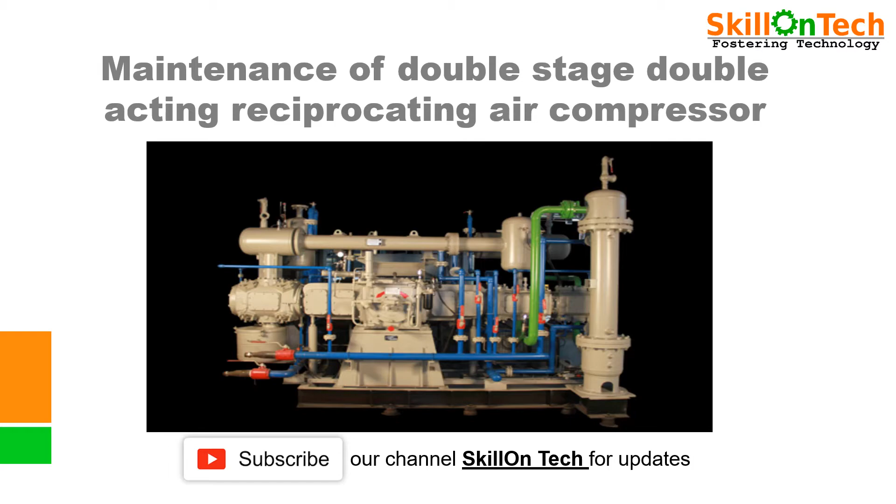Today I will explain and discuss about maintenance and overhauling of double stage double acting reciprocating air gas compressors. Why is maintenance required for compressors? A picture of a compressor is given along with important parts for your reference.

The air gas compressors used in industries provide continuous service and their operation leads to wear and tear in rotating components. After recommended hours of running as per OEM, vis-a-vis working in environmental conditions and our engineering experience, the compressor is to be taken under maintenance to ensure uninterrupted operations and avoid production losses of industries.

The discussed compressors are non-lubricated type, balanced opposed, horizontal axis, double stage, double acting reciprocating compressors. In double stage, double acting compressors there are two cylinders: one is LP cylinder and another is HP cylinder. Here you can see the difference in sizes of the cylinders. The bigger size one is the LP cylinder and the smaller size volume cylinder is the HP cylinder.

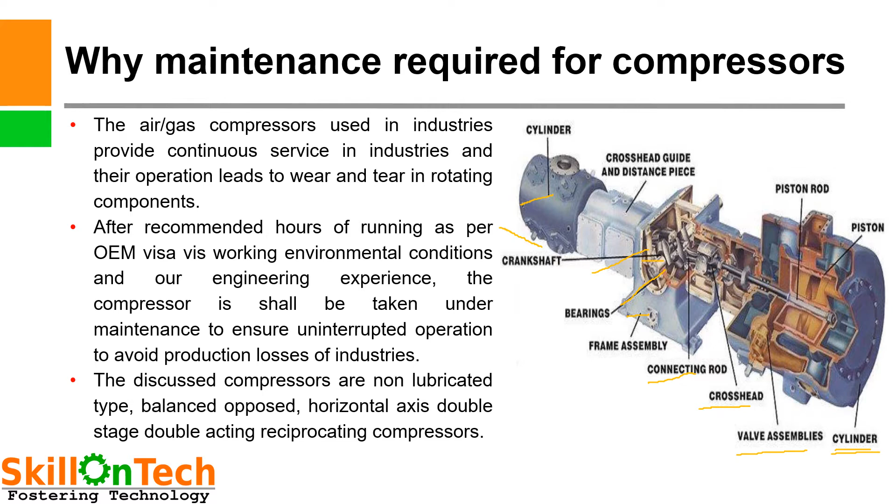When a compressor is to be taken under maintenance, there are certain criteria and decisions. The first point is operating hours of the machine. So how many operating hours have been completed by your compressor is a very important criteria.

Environmental working conditions plus our engineering experience with the machine matter too. We know in some industries there is a dusty environment and in some there is a clean environment, so this environmental working condition is a very important factor to be considered while maintaining a maintenance schedule. Besides this, we have to also include our engineering experience for preparing maintenance schedules.

Results obtained during predictive maintenance are also important. While carrying out predictive maintenance, we have to measure the temperatures, the speed of the machine, and the vibrations of the machine. All those factors are to be considered while carrying out preventive maintenance as per preventive and overhauling maintenance schedule.

In case of breakdown of the compressor, if any breakdown occurs suddenly, then we have to carry out maintenance of the compressor. If the compressor is not giving desired performance, if it is not giving flow and pressures as per design features, then we have to carry out maintenance or overhauling of the compressor.

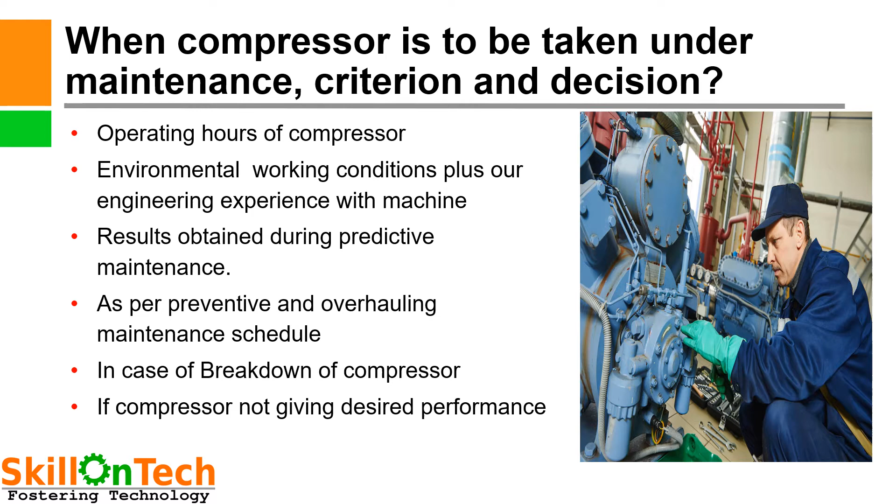What are the important checks under maintenance? Let us know. Clean or replace the air filter. Change the oil filter element, primary and secondary. Tighten or replace gland packing. Inspect oil scraper rings.

Replacement of crankcase oil as per OEM recommendation. Check the belt tensions of the compressor, or replace the belts if worn out. If one belt is worn out, we have to change the complete set of belts, otherwise tension of the belts will be different and our belts will wear out fast.

Flywheel and motor pulley grooves: due to long operation of the flywheel and motor pulleys, the grooves become deepened. This also causes worn out belts and belt slip to occur, which will reduce the flow of the machine. So that is to be checked.

Cooling water supply, inlet and outlet, is to be checked. Moisture traps working and strainer cleaning. Solenoid valve and pressure switch working or inspection. Calibration of HP and LP side SRV safety relief valve.

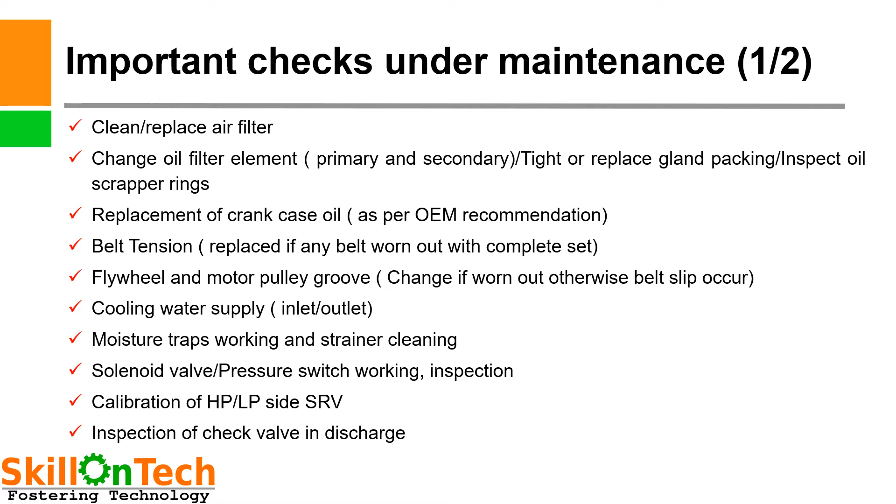Inspection of check valve in discharge, because sometimes our check valve may be faulty and backflow may occur to the discharge or suction valves. Replace worn out valve plates, spring plates, and testing of valves. Piston rings or sealing rings, if they are worn out, shall be replaced.

Piston and piston rod blocking nut shall be checked time to time for perfect tightening of the piston with the piston rod. Cylinder condition.

We have to check the LP and HP cylinder conditions, whether there is scoring or pitting marks. We have to check the dimensions of the cylinders, whether they are correct or worn out. If the cylinder is worn out, it will not give desired flow because there will not be perfect compression. Intercooler and aftercooler tube bundle cleaning.

Over a long period of working, intercooler and aftercooler bundles can be clogged. So time to time cleaning of intercooler aftercooler bundle is required.

TDC BDC clearance check. While carrying out maintenance, we have to check the TDC BDC clearances, and that should be perfectly kept to achieve desired compression.

Replace journal main bearing, big end and small end bearings as per overhauling maintenance schedules or OEM recommendation. We have to check diametrical clearances of main bearings, small end bearings, and side clearances in crank.

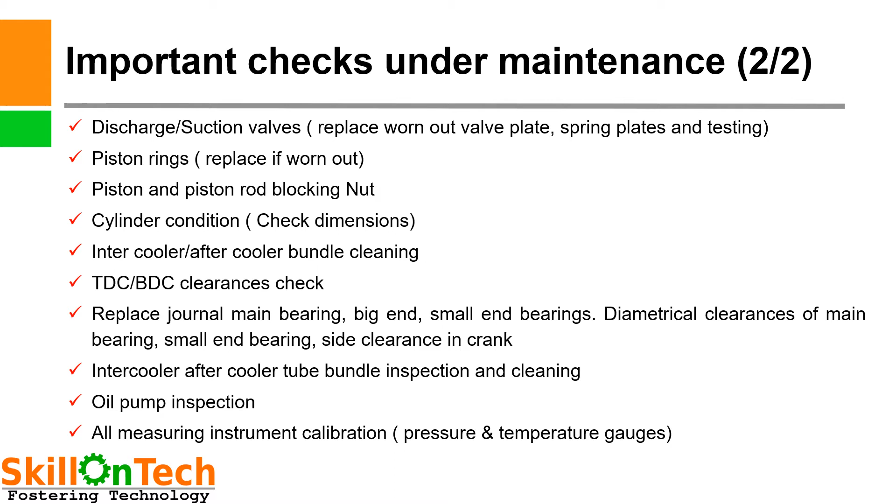All measuring instruments which are mounted on the compressors are to be calibrated, such as pressure and temperature gauges, during overhauling of the machine. Important components of air compressor.

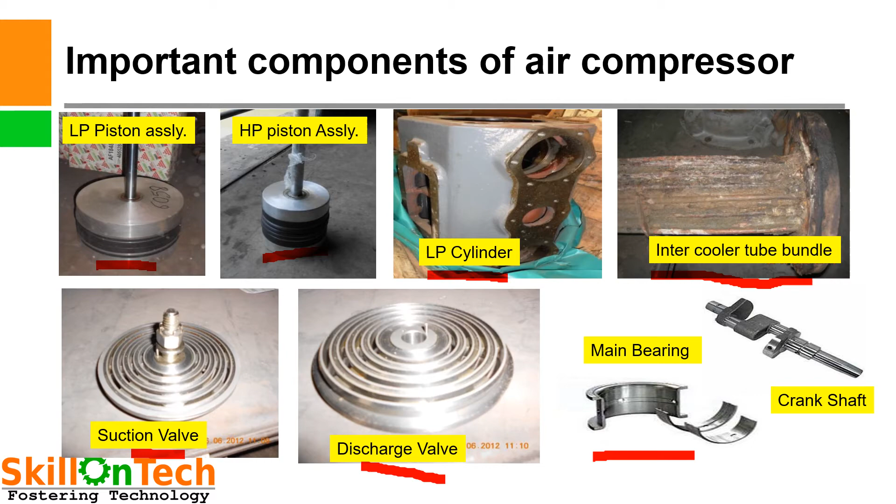Some important components are shown for your reference. Let us see. This is a LP piston cylinder assembly. This is a HP piston cylinder assembly. This is a LP cylinder. This is an intercooler tube bundle, which you can see is already under operation and in clogged condition, which requires cleaning. This is a suction valve, the discharge valve. These are the main bearings, and this is a crankshaft for reference.

Important components of air compressors. Internal components of air compressors are shown here for your reference. So let us see. This is a crankshaft which is shown. This is a connecting rod, as we already discussed, and this is a piston rod.

In the piston rod, on one side there is a stuffing box with gland packings, and on this side are oil scraper rings, which are mounted here inside for preventing oil slippage from the crankcase to this chamber and outside into the atmosphere.

This is your cylinder, and this is a compressor inlet. This is compressor discharge here. So once LP compressor discharge will go to the HP cylinder inlet.

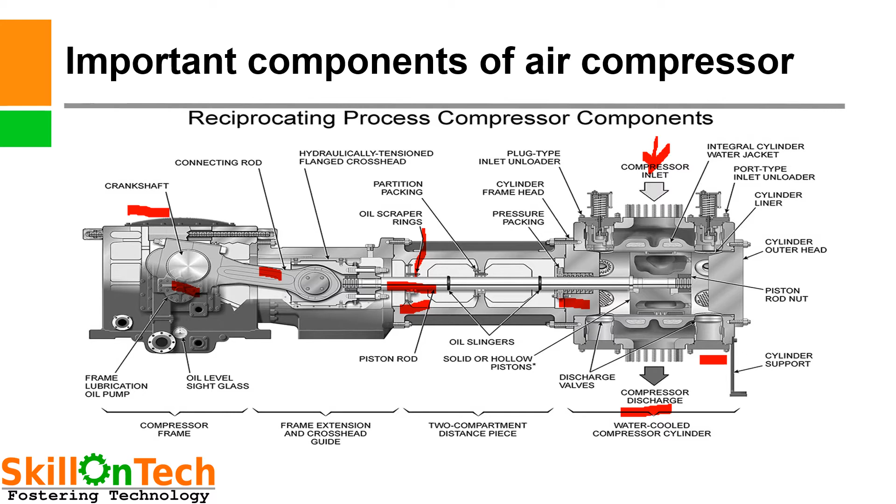Let us know the dismantling procedure of air compressor during overhauling. Dismantling of air compressor shall be done using proper tools. So technicians must have proper tools, and then only they should start dismantling of the machine.

Otherwise accident may occur. If we use non-prescribed tools, that may lead to accidents.

So first of all, what we will do is drain lube oil and collect it in another bucket. Remove belts. Remove all measuring instruments, pressure gauges, temperature gauges.

Remove LP-HP safety relief valve. Dismantle intercooler and aftercooler. Remove suction and discharge valves, and then dismantle end covers of HP-LP cylinder.

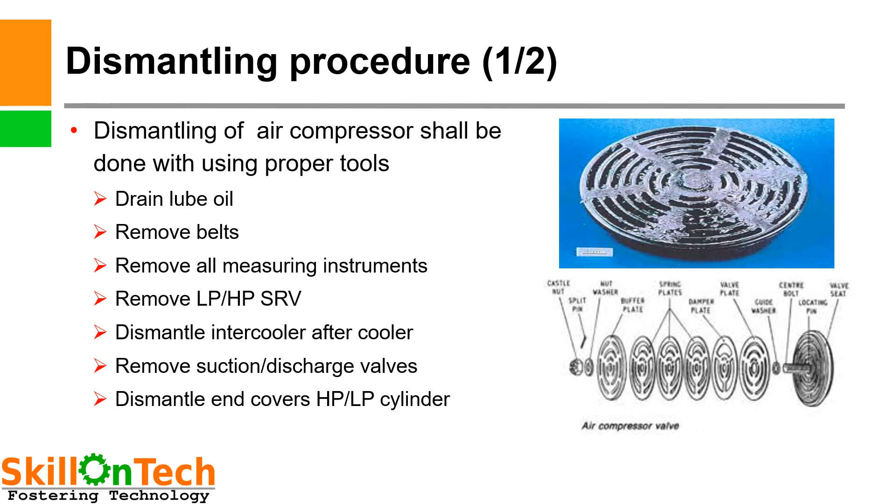Dismantle oil scraper rings and remove gland packings with suitable tools. Dismantle LP-HP piston assembly by opening the blocking nut and further opening the piston nut. Open LP-HP cylinder jacket covers.

Remove flywheel. Proper care shall be taken in handling. Dismantle lube oil pump. Dismantle connecting rod, main bearing, big end, small end bearings.

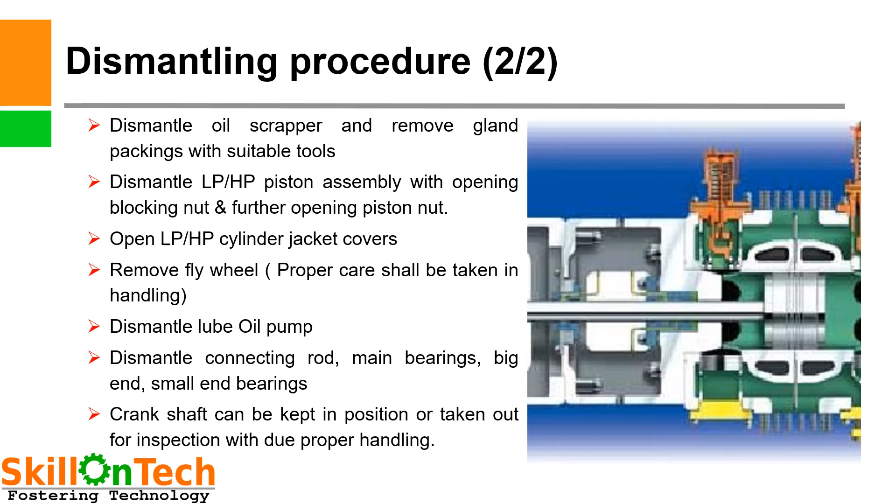Crankshaft can be kept in position or taken out for inspection with due proper handling. We can retain the crankshaft inside the crankcase chamber, or if required for thorough inspection, it can be taken out from the crankcase to the floor. But during removal of crankshaft, proper handling technique shall be adopted to avoid any damage to the crankshaft.

Inspection and maintenance actions. While carrying out overhauling of the machine, what inspections are to be done and how maintenance actions are to be performed.

Inspect piston HP LP piston ring groove, and piston rod for scratches. If grooves have increased in size, replace piston. Piston rod shall be scratch free, otherwise leakage occurs through gland packings.

Electroplating hard coating can be done, or replace the piston rod. Either electroplating hard coating can be carried out on the piston rod, or if that is not possible, then we have to replace the piston rod if there are scratches on it.

Pure Teflon 8 mm gland packing, first and last, with molded graphoil packing shall be used to avoid scoring over piston rods. So when we use these gland packings for the stuffing box, the first and last packing shall be 8 mm pure Teflon gland packing, and internal packings can be graphite, which will increase the life of the piston rod.

Inspect and measure cylinder bore. If cylinder bore is increased or corrosion pittings are found, fix a liner or replace the cylinder. The bore in the 2HA2ST model cylinder for LP is 250 mm dia and 140 mm in the HP cylinder. So these dimensions are to be checked during inspection.

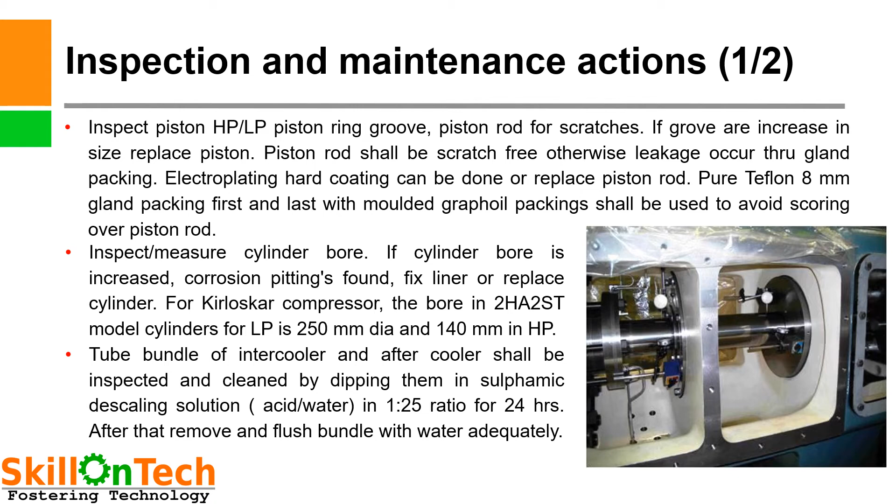Inspect crankshaft for corrosion, pitting and scratches, if any. The journal bearings, which are 3 - one on the lube oil pump side and 2 numbers at the flywheel side - shall be inspected. Generally these bearings are replaced after 5 years of running of the compressor, or as per OEM recommended operating hours. So we have to check the journal bearings for rubbing marks or increased clearances.

If clearances of journal bearings increase, then your lube oil pressure will be reduced. So there must be clearances as per OEM recommendation in the journal bearing and crankshaft.

Connecting rod, big end bearing, and crosshead shall be inspected. If any deficiency is found, take corrective action.

Oil pump pressure adjusting spring shall be checked for tension - that is called the regulating screw. Generally it shall be replaced positively during overhauling of the machine. So the spring shall be replaced while we are doing overhauling of the machine.

Clean cylinder water jackets by brush, and all dust and muck shall be removed and flushed. Compressor discharge check valve shall be inspected and serviced during overhauling.

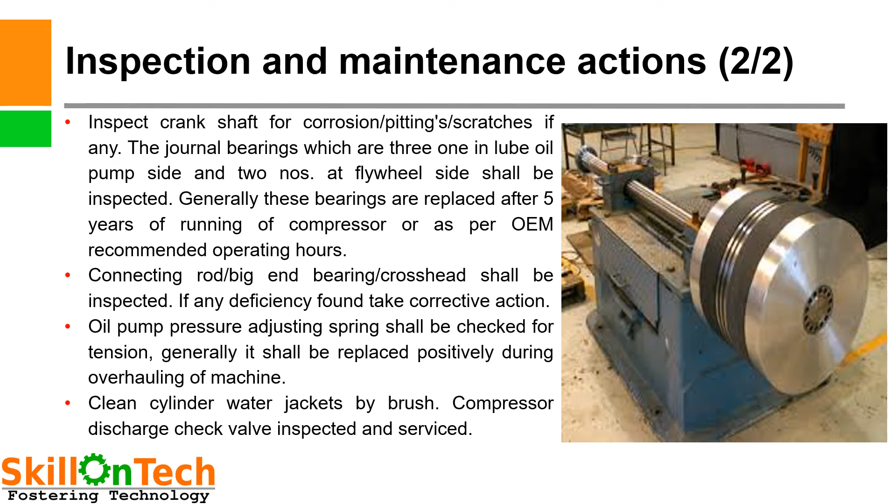We already discussed about dismantling and what inspections and maintenance are to be carried out. So after completion of all jobs, we have to assemble the compressor. Let us now know about assembling of the compressor.

Assemble the LP-HP piston by replacing suitable diameter sealing rings and bearing rings with new ones. Bearing shall be assembled by heating rings in an oil heater to obtain a temperature of 300 degrees centigrade, holding the piston in a vise. Use asbestos gloves while holding hot bearing rings for assembly.

New sealing rings shall be fixed on the piston. The increased clearances of the sealing ring shall not give compression, so therefore that shall be checked properly.

HP side sealing rings wear fast due to high pressure. Therefore they shall be replaced every 6 months or 3000 hours of running of these compressors. Main bearing shall be replaced with new sleeve.

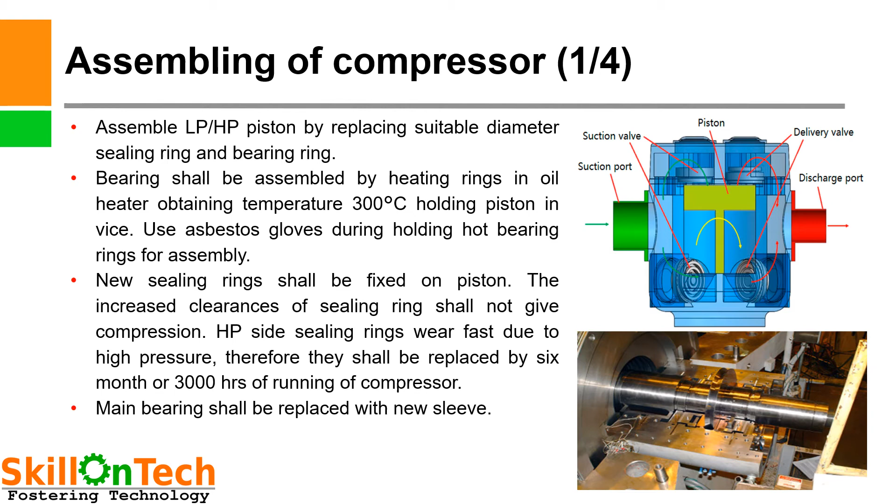The diametrical clearances shall be checked by putting a lead wire between shaft and sleeve and tightening it. Lead wire thickness shall be measured prior to putting it in and after compression. The difference will tell the clearance of the bearing and journal.

These are kept at 0.08 mm to 0.13 mm. The thumb rule for maintaining clearances is 1 micron per 10 mm dia of bearing. Apply lube oil over the crank while fixing bearings.

Assembly of the oil pump: replace pressure spring and flywheel. Replace oil seal towards the flywheel side cover.

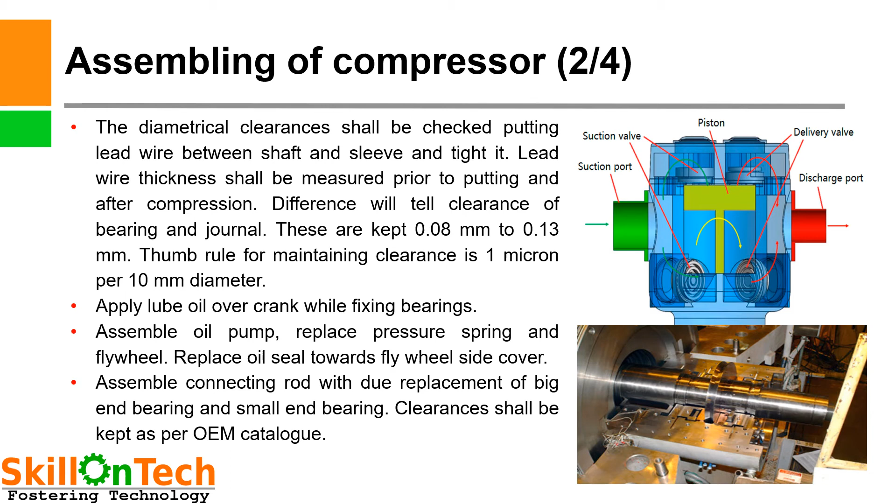Assemble connecting rod with due replacement of big end bearing and small end bearing. The small end bearing shall also be replaced. Clearances shall be kept as per OEM catalog, or as I suggested, 1 micron per 10 mm dia.

Box up the cylinder cover with new 2 mm thick graphite gaskets as shown in the picture. Fix the piston assembly and maintain TDC BDC clearances.

TDC BDC clearances shall be kept at 2.5 mm at TDC and 1.5 mm at BDC. Generally TDC BDC clearances - top dead center or bottom dead center clearances - are kept in a 60:40 ratio of total clearance available. Suppose your total clearance is 4 mm, then you keep TDC 2.5 mm and BDC 1.5 mm.

These are taken with the help of a lead wire. Measure the thickness of the lead wire prior to putting it inside and measure again after compression. So what we have to do: first measure the thickness of the lead wire, then insert it into the cylinder for checking clearances of TDC BDC.

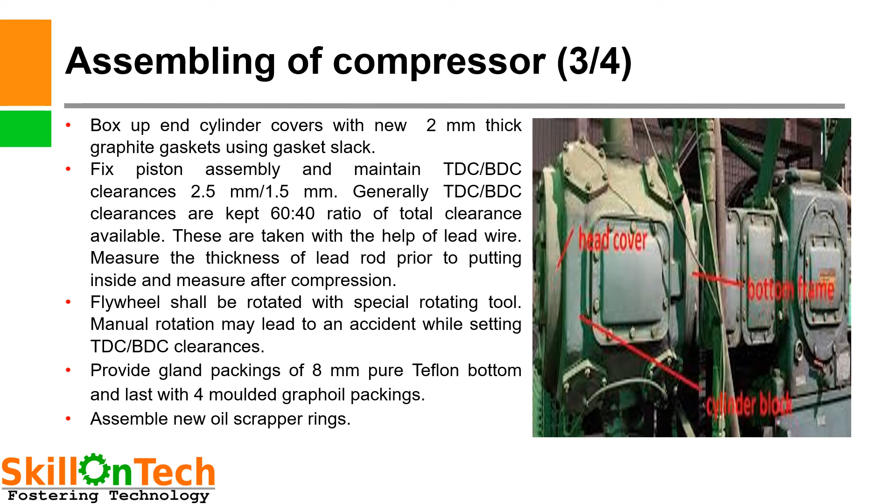Assemble tube bundle and install intercooler and aftercooler. After installation of tube bundles, we have to install calibrated LP HP safety relief valve.

Box up all the water jackets. Install tested suction discharge valve. All O-rings of unloader assembly, valve cover and copper washer shall be replaced with new ones.

While fixing copper washers, they shall be checked, and if they are having any damages, they shall not be used. We have to use new copper washer, copper rings or copper gaskets.

Install moisture trap which is due serviced. Install all calibrated measuring gauges, instruments and tubings.

Thereafter we have to install V-belts and check tension of V-belts. Tension shall be as per recommendation, and if belts are replaced, they shall be replaced with a full set of belts of one lot. Thereafter do alignment and fix belt guard.

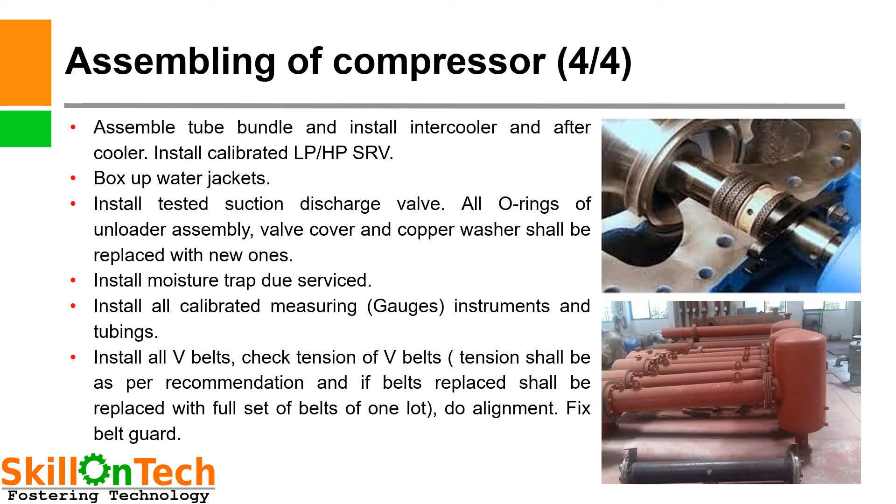After assembly of the compressors with due maintenance, we have to do testing also. Charge lube oil after replacement of the lube oil element, install air filter with due cleaning or with a new air filter element, and check free rotation of air compressor.

Your compressor is rotating freely, that should be manually checked. Restore electrical supply, open discharge valve, cooling water inlet outlet valves, open drain valve of moisture separator for 2-3 minutes and close after moisture draining.

Start the compressor and check performance. Observe sound of the machine and discharge air pressure and lube oil pressures. Lube oil pressure of the compressor shall be within 1.5 kg per centimeter square to 2.5 kg per centimeter square. Otherwise reset with regulating screw.

Ensure loading unloading of the compressor. We have to ensure that the machine is getting unloaded in due time and that loading unloading operation is performed by the compressor. Ensure all pressure and temperatures are within permissible operating limits.

We have to check the pressures of the first stage discharge and second stage discharge, and similarly the temperatures of the first stage and second stage discharge are to be checked to ensure that your intercooler and aftercoolers are functioning. After satisfactory operations, the air compressor can be taken in line for service for operation.

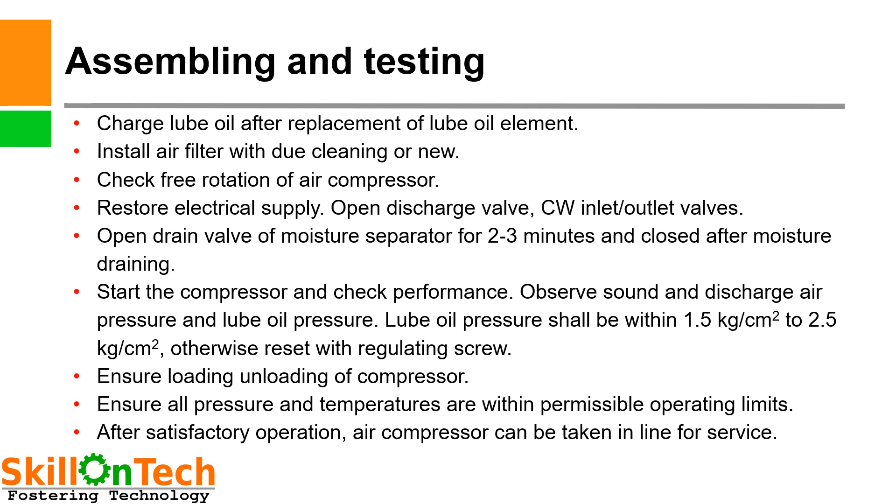General maintenance schedule: so we have to discuss what is the general maintenance schedule. A compressor requires proper planned routine maintenance for safe and efficient operation and to avoid breakdown maintenance. Routine maintenance depends on the manufacturer's advice given in the manual. The following are the maintenance checks that should be carried out after the mentioned running hours.

At 250 hours of running, clean air filter. At 500 hours, check unloader operation. If belt is provided, check its tightness. Change lube oil and clean lube oil filter.

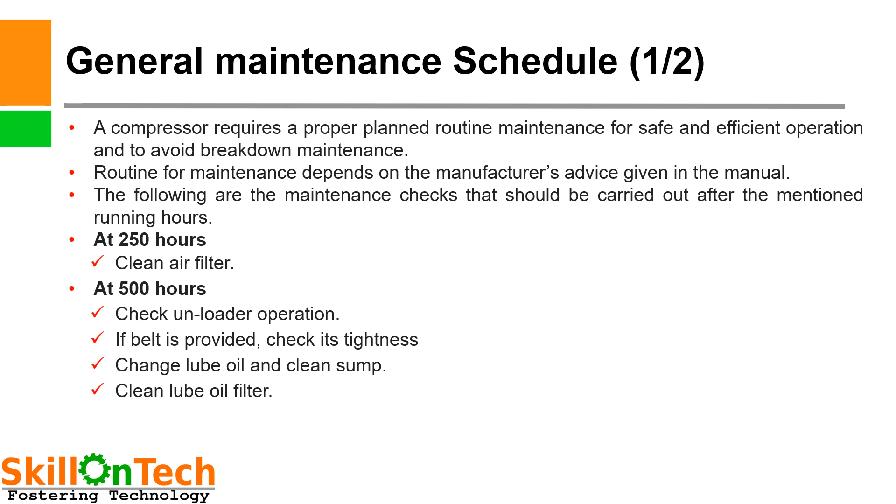At 1000 hours, crankcase inspection, main and big end bearing inspection, relief valve overhauling. Check and renew suction and discharge valve with overhauled ones at 4000 hours of operating.

Replace piston rings, bearing rings renewal. Intercooler, aftercooler and tube bundle cleaning and motor overhauling.

At 10,000 hours of operation, replace main journal bearings, big end bearing, small end bearing, oil pump regulating screw spring, and replace piston locking nuts. Running hours may differ from maker to maker, so the above description is a rough idea for a general maintenance of air compressor.